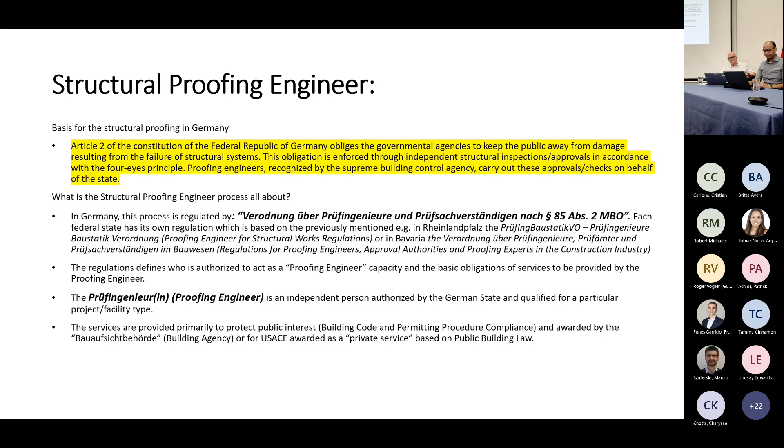Can I just add to that? Of course you can. So I guess we had a discussion on that based on our meeting yesterday. You consider this private because we want you as an A-E to contract out to the proofing engineer. But I think from a state building code consideration, this is still bauaufsichtlich. It's not a private proofing because it is required per the state building code. We just ask you to take this contract under your umbrella.

That is correct. Why we mention it as a private contract is because with the USACE, specifically in Rheinland-Pfalz, you have the accelerated version of the permitting, which allows you to choose the proofing engineer. The authorities don't tell you which checking engineer to take. We can actually choose it. We can ask for proposals for lump sums that include all the services, and hence that makes it more private.

Okay. I just try to distinguish private when it comes to, for example, Spangdahlem, where we built family housing, and we would not have to have it proved, but we still do so, because we want to add an additional layer of safety. So would we consider that private, like privatrechtlich versus bauaufsichtlich? Well, it also depends on the type of building, correct? It depends if you have building class 1 and 2, or 3, 4 and 5, which need to be checked anyway.

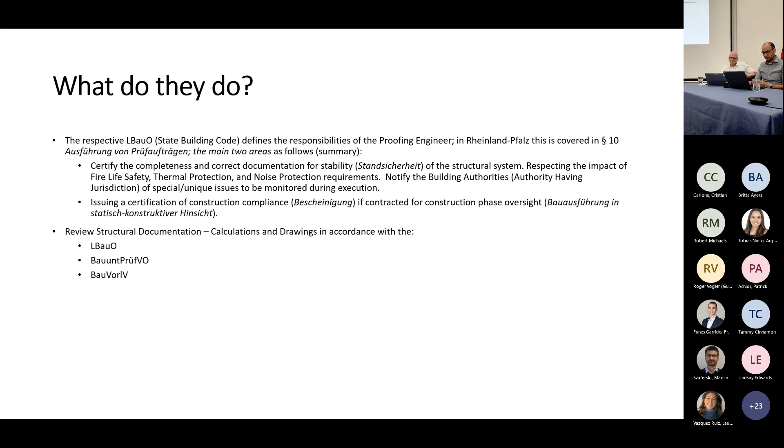If we go for a normal service, let's say that we go privately, the checking engineer acts according to the HOAI, which is the Honorarordnung für Architekten und Ingenieure, and they check pretty much the permitting stage, not the concept design, not the initial design. They pretty much check the full structural calculation. That's for the permitting process.

Once the permitting process has been completed and the structural calculation has been approved, he moves on to what we call Leistungsphase 5, which is the execution drawings or execution stage of the project. And he starts checking the reinforcement drawings, construction drawings, steel drawings, timber drawings, whatever the structure needs. And once we have the final approval for, let's say, the foundation or the roof, in the process of checking, he will issue different types of documentation called Prüfberichte, or reports, that he will hand over, but I'll talk about this in the next slide. So any questions up to here?

No questions. I might want to comment on that, mainly from the US colleague perspective, because I find when we have new colleagues that they see this principle of structure proofing, it's very surprising to people, how detailed this proofing is. Just for clarification, when we do technical review, we don't go into that level of detail. We check general feasibility: is it complete, does it make sense, is it coordinated? The proofing engineer technically checks every single number. He does. That's what people need to understand.

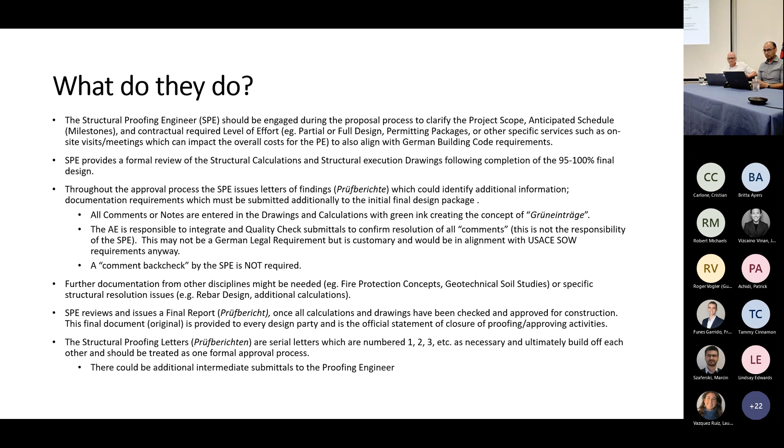He goes page by page by page, and he checks off with a little green checkbox every number, every load assumption, every rebar, really checking every line. Or they use independent software to check it, and they say they checked it independently with different means. So it's a very detailed, extensive review. Right. Thank you very much.

That might cause some sort of misunderstanding, because that means that, yes, the structural calculation has been approved, but the execution drawings have not. That doesn't mean that the structural calculation is wrong or in any way incorrect. It just means that the proofing process will still continue until he actually checks and approves the last pouring. Next slide, please.

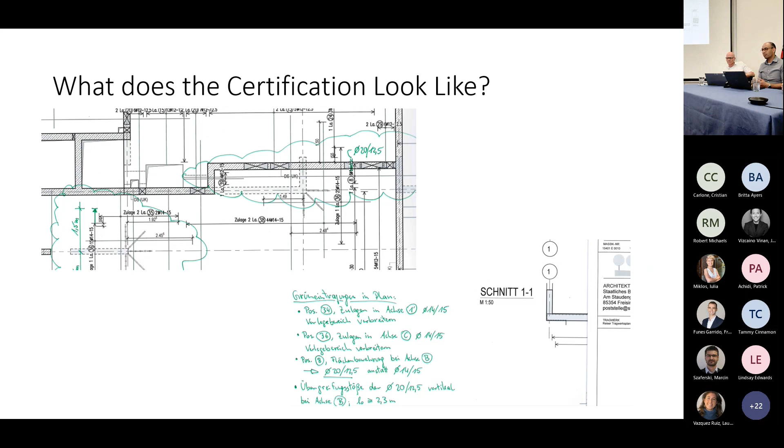Okay. So thank you, Thomas, for that initial introduction into the structural proofing engineer, and to build a bridge now over to Achim. Contractually, what does this mean for us as an A&E? It's an integrated process. The reference to that one requirement is a bigger requirement behind the scenes. It's going to affect your performance, your submittals, getting your 100% done, making sure that the Corps can get projects on the street and tendered as complete and ready to go.

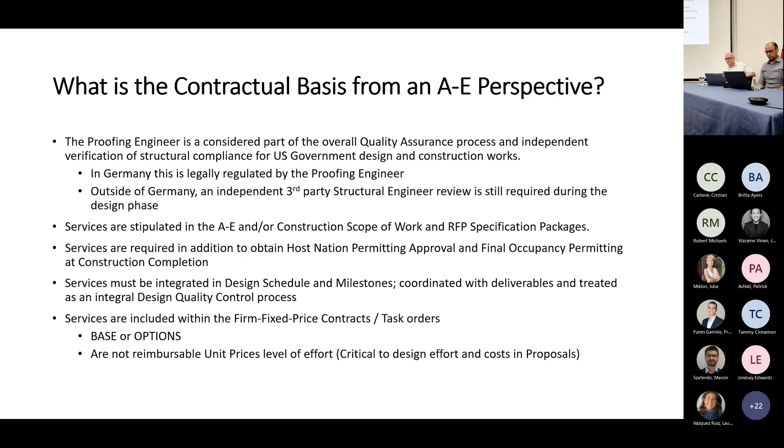Yeah, maybe I can speak to that. It's two things. A proofing engineer is licensed, but you have proofing engineers licensed for steel, concrete, timber. We have experience that sometimes we have proofing engineers licensed for concrete checking steel. So we are not certifying the proofing engineer. We just want to make sure that the proofing engineer that's selected has a license for the discipline in our project. Okay.

The second thing is that the proofing engineer has to travel to the construction site, and we have to pay for that travel, right? So we do not like to have a proofing engineer from Munich doing structural proofing on a project in Spangdahlem, and then we pay 700 euros for every trip. Mm-hmm.

So that's why maybe the way it's worded might be wrong, but we want to see who it is and say, yeah, we agree with that selection. Right, because contractually we have to disclose that when we do our proposals. Yeah. But if after the task order is awarded someone says, no, we don't like this selection, that raises maybe a conflict for us. I understand, but that's our background. It's not that we say, oh, we don't accept that person. It's more like those two reasons.

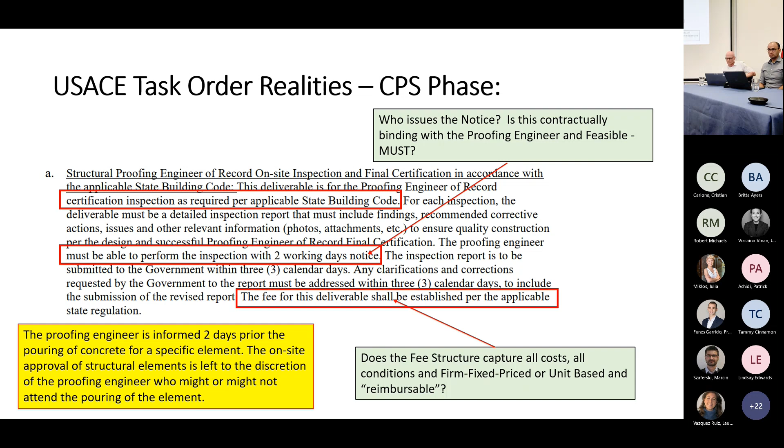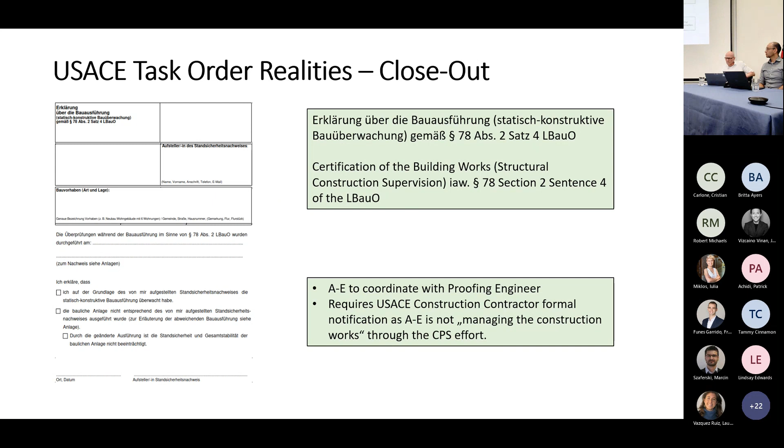So next slide. And again, to close out projects when the project's finished, there are some legal formworks that the structural proofing engineer has to acknowledge or prepare to help the final acceptance of the project before the occupancy permit can occur. So with that, just some recommendations for when you're doing your proposals. The type of project, the size of project, and locations of projects will all have influences on your proposals. So with that, are there any other questions?

I just have a comment on what we just discussed. It would be better to have that discussion prior, you know, like after contract award, to make sure this is a person we are putting on our bid, and we would say, yeah, it's acceptable. I mean, at least we present those for our subcontractors in our proposals, and so obviously it's up to the COR and contracting then to take a look at it, right? Need to think about. Okay.

So with that, we'll take a leap over to Achim's world from the government perspective and see what he has to say about this. Yeah, I think we touched a lot on this, but I tried to look at this from our perspective, what our expectations are, what our challenges are. Next slide, please. That's just my name. So obviously our goal is, for Germany, we want to meet the permitting requirements, right? And we take advantage of that to get an additional layer of quality assurance during design and construction.

And what we decided for ourselves, I think you have it on the slides, is that outside Germany we want to have a similar layer of QA oversight, but only for the design package, not during construction. We just want to get a proved and checked package as well that we give to the construction contractor. Because outside Germany, we don't have that mandatory proofing engineer. So we try to establish something that is similar or close, which is a challenge, and I'll come back to that later.

And our goal is we want to get a project life cycle independent structure proofing. We want to have it all in one hand. We don't want to have it partially under the A&E, partially under the construction contract. That's our goal. Next slide, please.

So what I have here, like you had, are some extracts, I need to go to the next slide as well. These are extracts from my scope of work, and I also highlighted a few things, as you already had: appropriate discipline is important for us, since the proofing engineers have different licenses, so we want to get the right person. Also, we want to have at 100% design a complete set of proofed and stamped structural drawings.

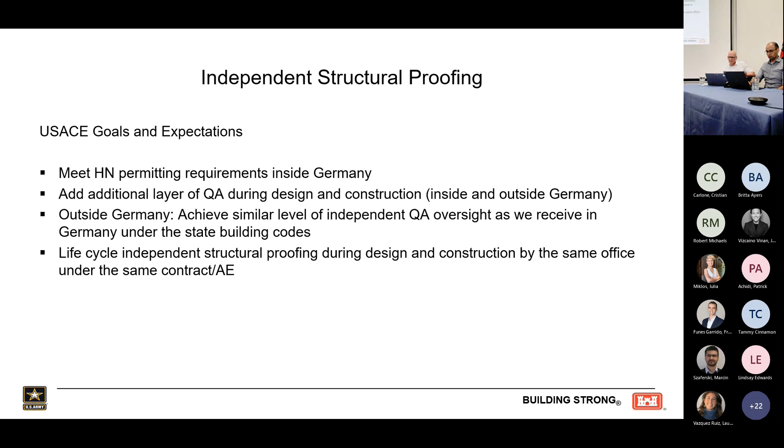So what I was trying to say is, sometimes if the A&E doesn't get the construction services awarded, you have it under the construction contractor, which is not what... Got it. Okay, so there's a scope of work.

Yeah, so that's our goal, to get that one package. Next slide, please. This is still our scope of work for inside Germany.

And here it becomes a little tricky, I think, in the scope of work language. You never know if the construction phase support service option is awarded, so we try to word it in a way that accounts for what happens if. We want to have everything in one hand, but if that option is not awarded, we still need to have the site supervision and the shop drawings reviewed under the proofing engineer. So in that case, the A&E needs to put this into the specification for the construction contractor to award it.

And that's where this reference section 4 comes into play. So that's a little tricky from the wording.

Maybe if I can interrupt you for a second with an example. If we have a complete in-situ concrete building, the contractor produces all the reinforcement drawings, we go through the proofing engineer, and hand over according to German market standards with bending schedules, different sizes or different bars shown in the drawing. Then the construction firm goes, I want to use prefab or half prefab.

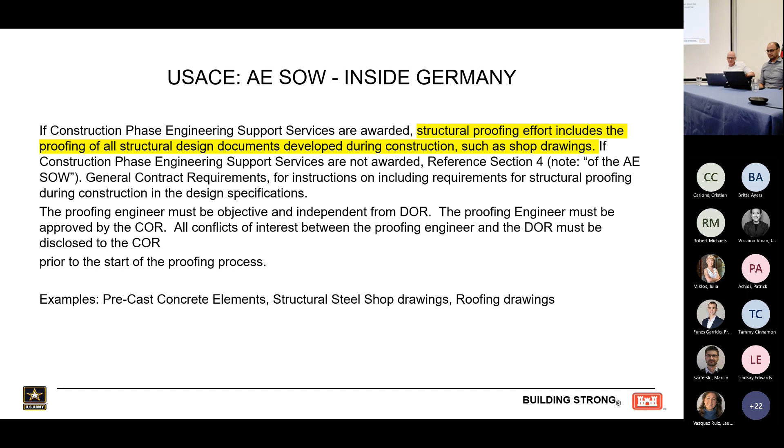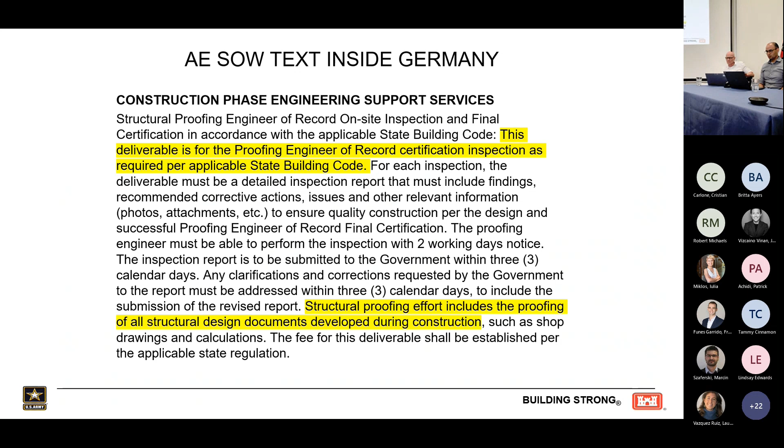Okay, next slide please. This is a scope of work from that construction phase engineering support service option. So that's where we want to have the proofing engineer under the A&E go out, as you mentioned before, to the site, to the inspections, and also check all the documents that come from the contractor, like structural steel shop drawings, prefab element drawings. Roofing is typically something that comes from the construction contractor.

And next slide please, this is the text which we put in the scope of work for outside Germany. It's a little less, nothing during construction, but this is not a host nation code requirement. We just try to get the same QA package as we get in Germany.

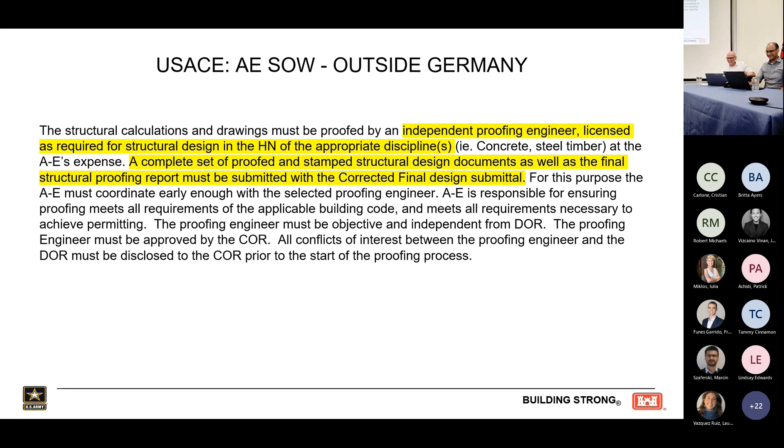Are you getting, from your experience, the level of quality you're looking for outside of Germany? I think I have it somewhere as a challenge. Okay. I hope I have it. Yeah, we're on the next slide. So... we sort of had it.

Oh yeah, it's coming later. Okay, yeah, I'm going to talk about that because it is a challenge. So these are the expectations and challenges again.

The consideration of structural proofing if the construction phase option is not awarded is definitely a challenge for us. So we try to get that awarded.

The fee structure is kind of interesting because it's based on fixed fees as a certain percentage on a theoretical construction cost. However, modifications are reimbursed based on number of pages of the modification. So our approach is always the base structural calculation should always have as many pages as possible, and the modification should always have as few pages as possible, because the fee is established by the percentage of pages per modification divided over the original pages. So that's a challenge because at the beginning you don't know what the cost is, and then the travel cost is reimbursed based on actual cost, like mileage.

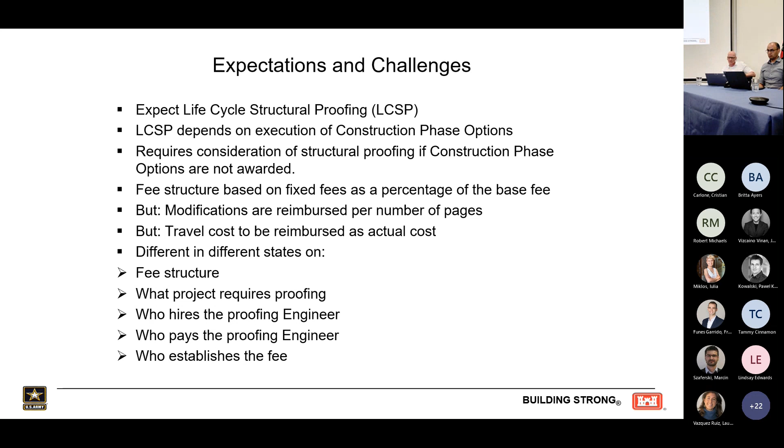Next slide, please. We have those two attachments as optional to look at. I don't know if we have the time just to give people an idea of it, or maybe we can do it at the end, we have a little bit of time. Yeah, if you'd like. Can you pull up the PDF?

We have two PDFs which we created to understand what requires structural proofing. This is the first PDF, and I don't think we need to go into details, but just to give people an idea - on the left-hand column you see the states, Rheinland-Pfalz, Hessen, Bavaria, and in the columns you have different requirements, like who pays a proofing engineer, who determines the proofing fee, who hires a proofing engineer. If you look at all the hyperlinks and regulations there, you'll see it's a mess - every state does things differently. So when you go from Rheinland-Pfalz to Hessen, everything changes and you need to start looking at it again. It's different code, different paragraphs, different regulations. Sometimes the state hires a proofing engineer, sometimes the customer can hire the proofing engineer - it's all different. Sometimes you get lists where you can put the preferences.

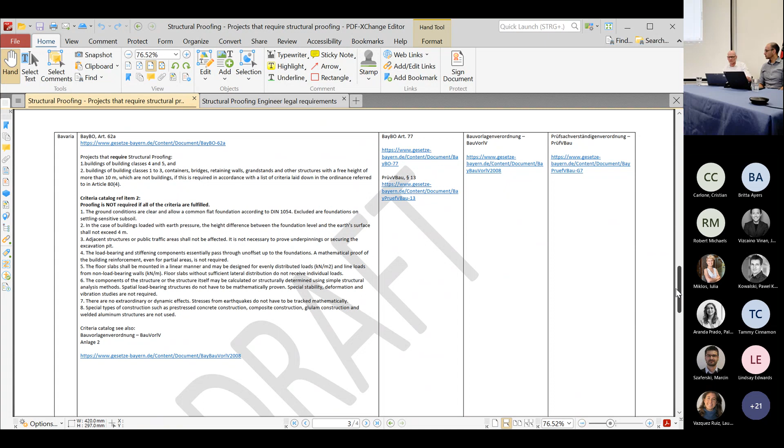If you could open the other PDF - this is also a little mind blowing. This is just an extract from the state building code, showing what projects do require proofing. This page is Rheinland-Pfalz - these are the projects that require proofing. If you scroll down, you'll get to the other states, and in every state the language changes. The content is kind of the same, but the way it's described is different in every state. In some states it's described as 'the following projects do require structural proofing.' In the next state it says 'the following projects do not require it.' So you always need to be careful how you read it, to understand what projects actually require it.

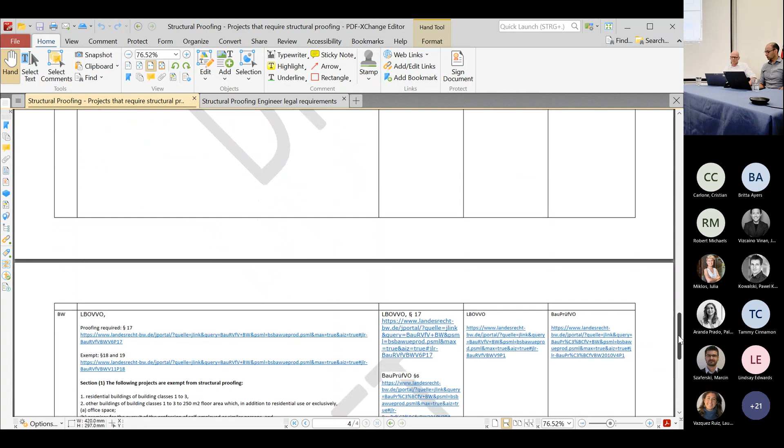Just to let everybody know, these documents will be made available to everyone who attended. These two PDFs we sent to you - it's a draft which we put together. Is that okay? It might be okay, but at your own risk - I don't guarantee that it's all helpful. No guarantees, that's all. Next slide, please.

Oh, I'm sorry. A funny thing that you say with different regulations - I just figured out that in Rheinland-Pfalz, in some buildings, I cannot put my stamp on it because I didn't get it before 2009. Oops. Okay, yep.

So that's outside Germany, as you asked before - yes, we've just started that. It is challenging, like the familiarity with the process for engineers outside to understand what we actually want. This is what we want - we don't just want a letter saying 'yeah, I checked it, it's all good.' We want to get the same result we get here. So we need to teach people what our expectation is, which is challenging.

I think we need to come up with a document to actually describe what our expectation is, because this paragraph in the scope of work is very generic. We need an attachment that says 'this is what we want to see.' Also, of course, we look for an A&E that is familiar with local laws and regulations in the state where we have a contract, and then also tracking those reports on our side. We need to make sure we track those reports as well as we track them on projects in Germany - on a project in Germany we will always ask where's your proofing report. Outside Germany, because it's not required for permitting, sometimes it gets lost.